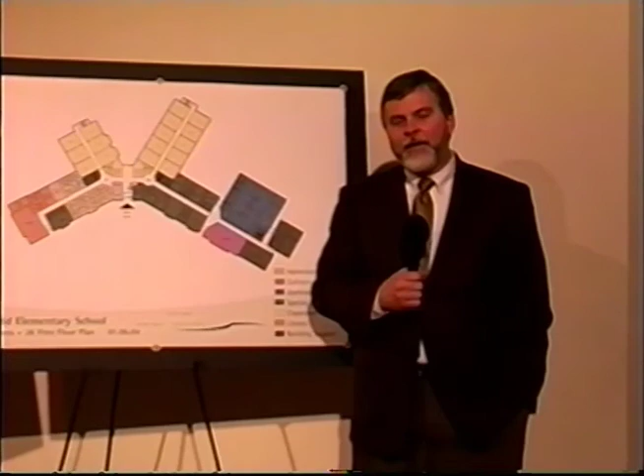Hi, my name is Dan Cecil. I am the architect of the new Litchfield Elementary School. I'm a partner at Harriman Associates, and I lead the education team in the office, and I'm very happy to be here tonight to have the opportunity to walk the community through the site plan and the floor plan and give you all the information that you would need in order to understand the project.

We are an 80-person architecture and engineering firm. We're actually the 6th oldest firm in the country. We're 130 years old, and we've been building schools all over New England that entire time. It's quite a privilege on our part to be able to have a chance to work on this school with you.

Right now what I'm going to do is pull up onto the screen images of the site plan and then images of the building plan so I can describe them. You can get more information from the superintendent's office, where there are plans and site plans to look at, and we'll have handouts at the deliberative session on February 7th.

Litchfield Elementary School, building for our future. Why do we need a new school? To address the overcrowding at all 3 Litchfield schools.

Currently, the Griffin Memorial Building is very overcrowded. Right now, we have 5th grade in portables at the Litchfield Middle School, and our superintendent's office takes up several classrooms at Campbell High School. By building a school for grades 1 through 4, putting 5th grade at the Griffin Memorial Building and the SAU offices at the Griffin Memorial Building, it relieves the overcrowding at all 3 of the Litchfield schools.

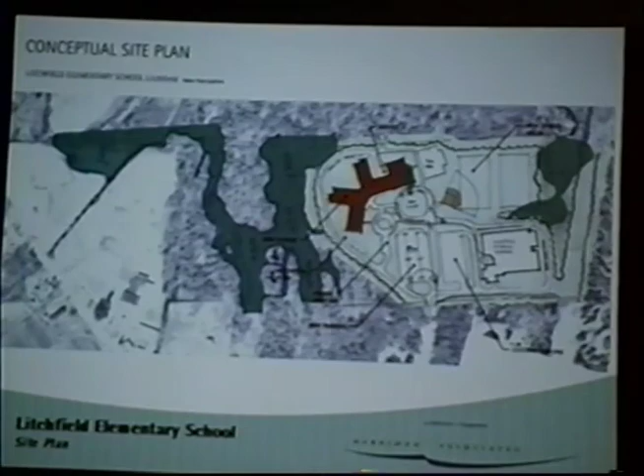On your screen now, you'll see a copy of the latest site plan of the new elementary school. Just to orient everybody, on the right-hand side you'll see a white block, and that's the Litchfield Middle School. In the center of the drawing, the red block is the proposed footprint of the new elementary school. Over to the far left, in this aerial photograph, is the Griffin Memorial School.

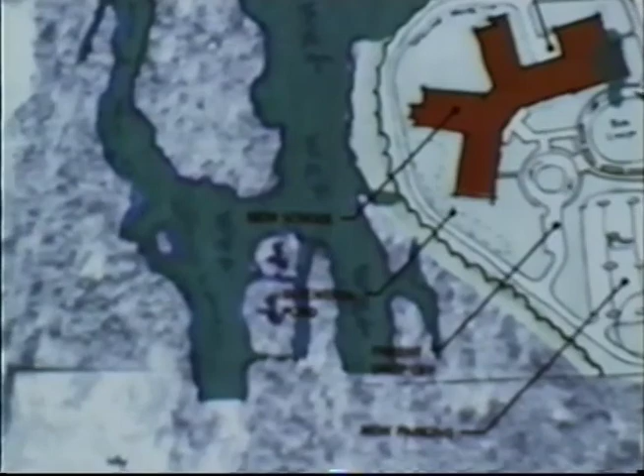There's a large wooded area in between that's actually quite a beautiful area. The area to be developed to the left of the Litchfield Middle School is about 12 to 13 acres total. It's quite a beautiful site for a school, heavily wooded right now. We're going to try to save as many trees as possible to keep the feeling of the site, especially to the north, west, and south, which are quite nice because the site is about 20 feet higher than the ground that Griffin Memorial sits on, so it'll have some views down into the woods and beyond to Griffin.

We've had a number of studies done to verify the viability of the site for a new school. We've had meetings with the Department of Education, with police and fire, the roads agent, and codes enforcement officer. We've had wetlands mapped, and soil tests done where they came on site and dug around 30 test pits to determine the character of the soil. We've also had a traffic study done to study the impact of additional traffic on McElwain and how that traffic should circulate on the site once it gets there.

We have a consultant on board working on the location of a septic field, because this building, like the middle school, will have an on-site septic system. There will, however, be municipal water coming to the site.

The soils report was so good that the soils under the building are high enough quality that we'll be able to reuse them under the parking lots and under the building, which is a terrific thing from a budgeting standpoint. A lot of sites have soils so poor that you can't use them, and you have to bring in sand and gravel off-site, which is fairly costly. In your case, you have about 15 feet of glacial till above ledge and above the water table, which makes it a very good site from a technical standpoint and will minimize construction costs in that area.

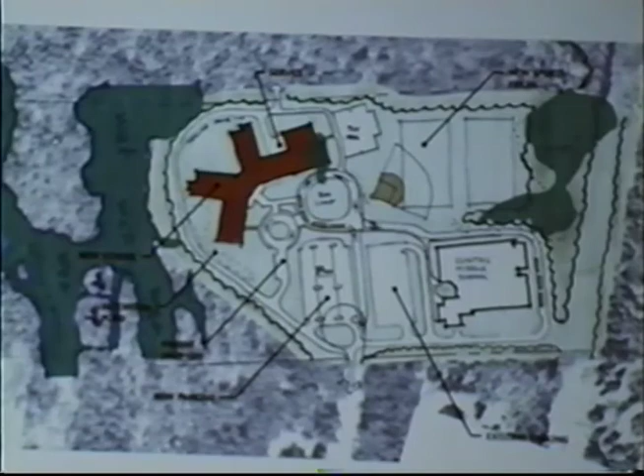Access to McElwain, the white band at the bottom of the screen, will remain the primary access to the site. All cars and buses will come up that way, but there is a secondary emergency egress off the site that I'll get to in a moment. Some road improvements will be required on McElwain to handle left and right turns on and off, but those are modest in size. The traffic study found no need to widen McElwain, since it's plenty large to handle both existing traffic and what we'll bring to the site.

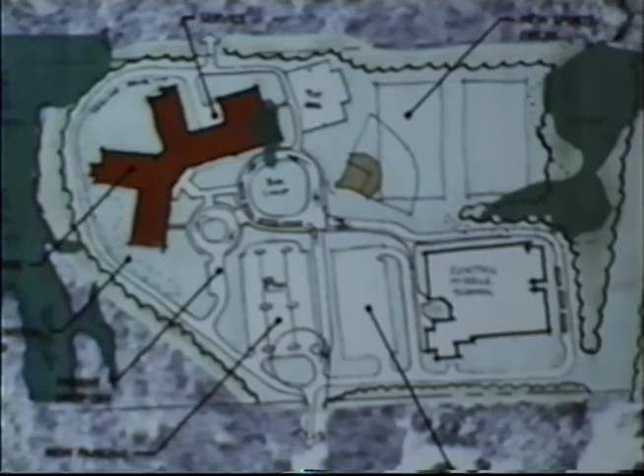One of the most important things in deciding where to put a building on a site is to look at the solar orientation. To orient all of you at home, the top of your drawing is roughly due north, so you can see the building footprint is oriented so the front faces roughly south and east. This is the ideal orientation for passive solar gain.

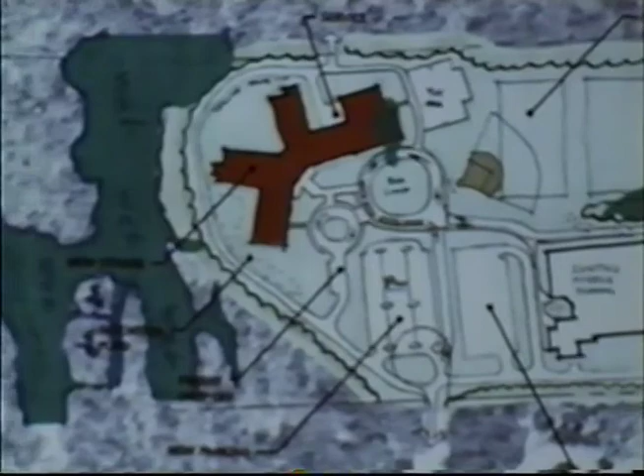It means we'll get the most impact from the sun during the day. We've turned the building so there'll always be sunlight on it from about 7 in the morning till 3 in the afternoon, when the kids, teachers, and most of the people are in the building. This makes a very welcoming entrance to the building. The other effect is that heat reflecting off the building from the sun helps melt snow and ice that accumulate after storms, so we get a little help from Mother Nature to make the entrance to the building safe.

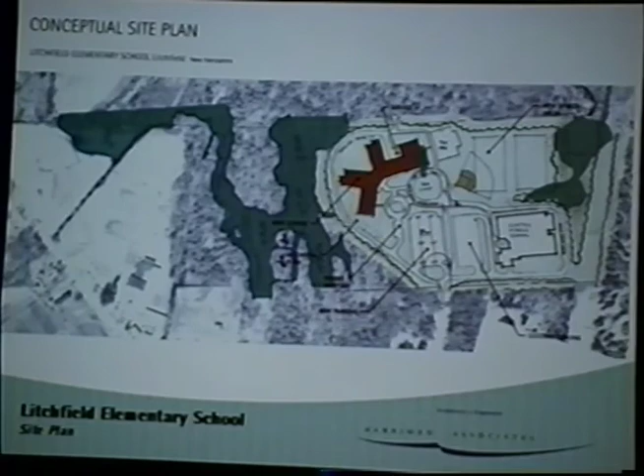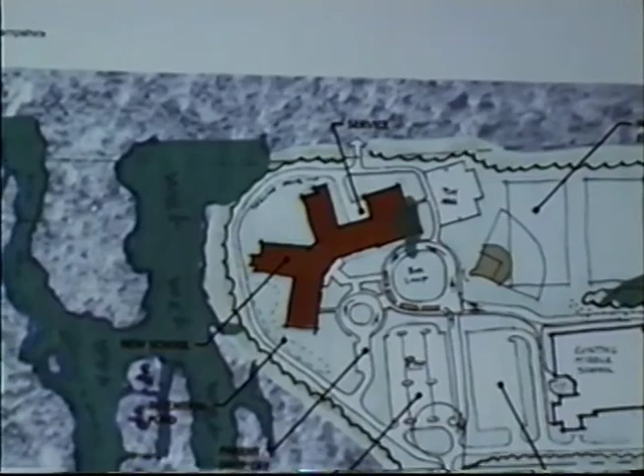In terms of the configuration of the plan, the building has an X-shaped configuration that's bent in the middle, because that is the space available on site after you put in place the parking, the bus drop-off, the parent drop-off, playgrounds, play fields, service drive, and all of those items. So the building is efficient in its layout and is taking advantage of the site. And in fact, the soils in those areas are very, very good as well. I'll talk in more detail in a few minutes about where exactly each piece of the building is in the plan.

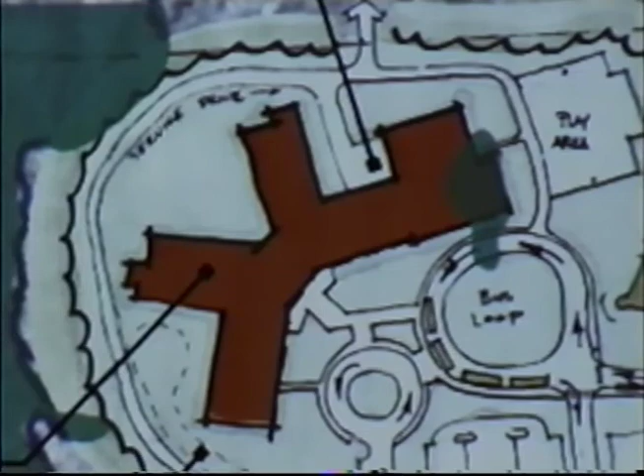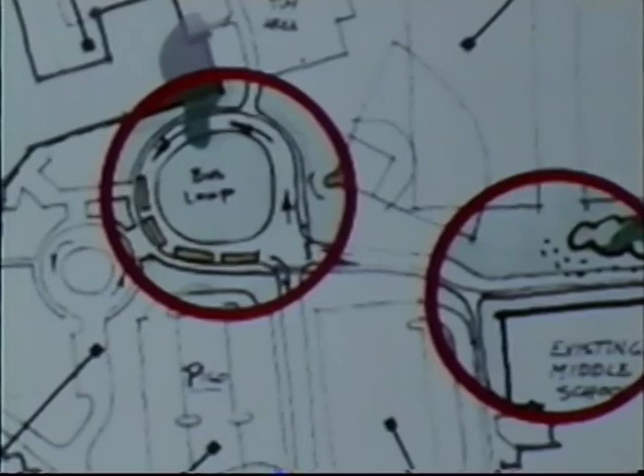The first thing you do when you start laying out a site plan for a new school is attempt to separate the buses from the cars from the pedestrians. This is an issue right now with Litchfield Middle School, in that in the morning and afternoon, buses and cars compete with each other for the driveway space and the stacking space to drop kids off or pick them up, lengthening the amount of time that activity takes. It also mixes buses, cars, and pedestrians walking in between them, which is inherently unsafe—something this plan attempts to rectify.

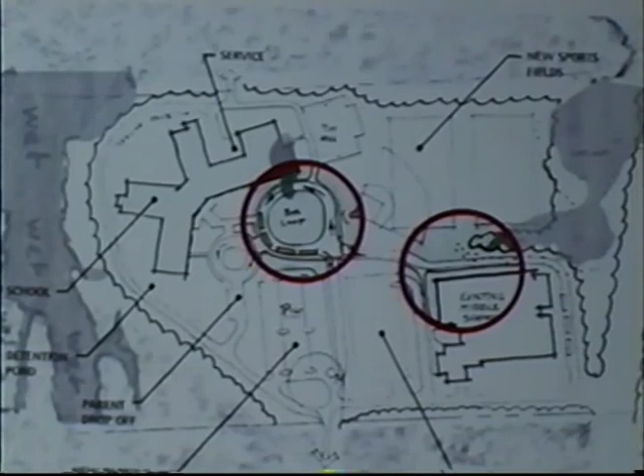So when we started the layout, the first thing we did was lay out a bus loop for the new elementary school. On the screen there are two red circles. The left one locates the bus loop for the elementary school. The right one shows where buses for Litchfield Middle School will now drop off. Buses will enter the site, go straight up to the middle, drop off kids at the elementary school, then leave, go pick up the middle school kids, come back to the site, and turn right to drop off students on the upper side of Litchfield Middle School. This way, buses stay separated from cars and can stack as long as needed without interfering with pedestrian or vehicle traffic.

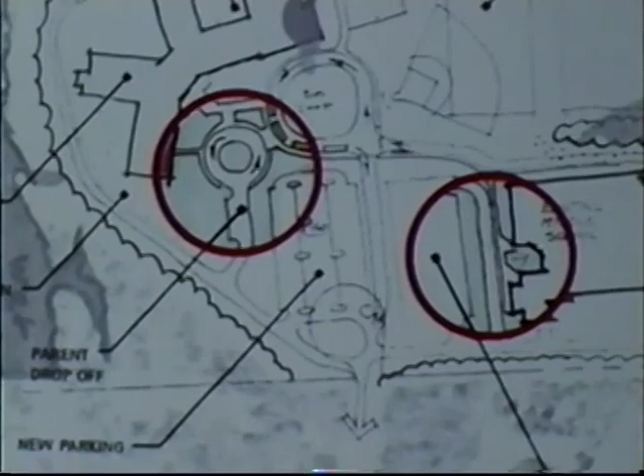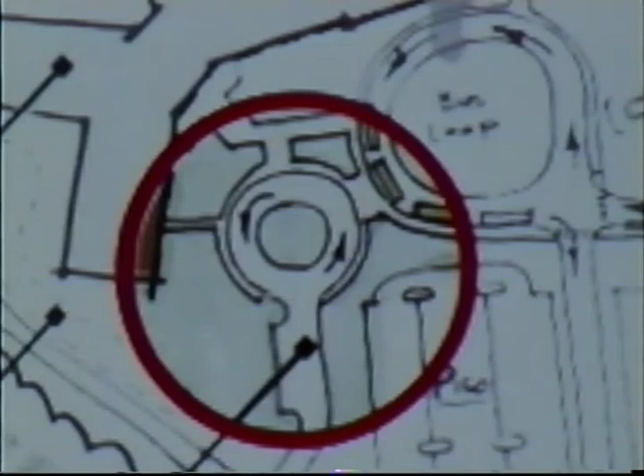In the next slide, we show you where the parent drop-offs are proposed to be. On the left-hand circle is the parent drop-off for the elementary school, positioned so that the bus loop and the parent loop never cross each other. Parents will drive onto the site, and instead of going straight like the buses, they'll turn left, go up to that loop, stack up, drop the kids off, then pull out and leave—never having to cross the bus traffic.

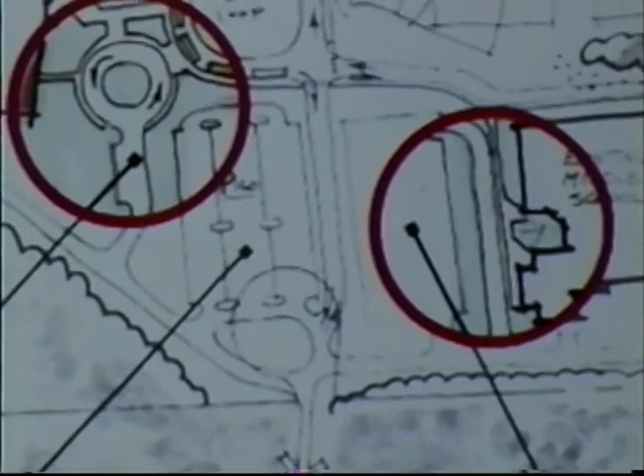In the case of Litchfield Middle School, the drop-off driveway in front of the school that exists now will be dedicated just to automobiles and parents. Parents will come into the site, turn right, pull up in front of Litchfield Middle School, drop off kids, and then circle back around and leave the site, staying separated from the bus loop circulation for Litchfield Middle School.

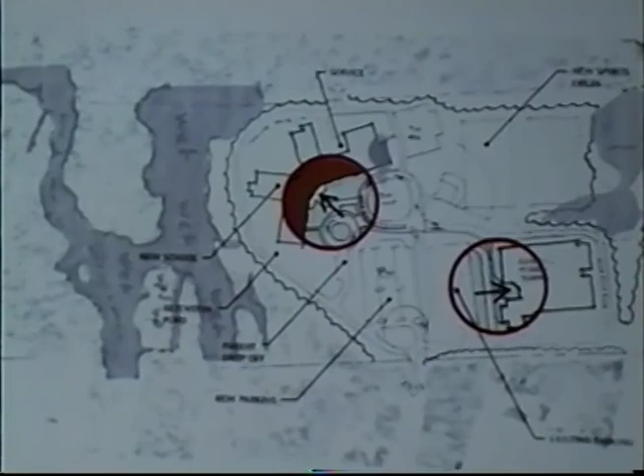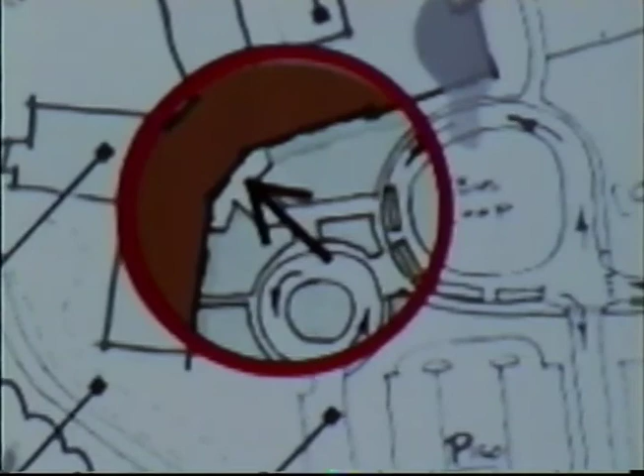The entrances to the building are shown in circles, highlighting how both the bus and car drop-offs are focused right in front of the building to make the walk from those areas as short as possible, especially in bad weather, and to make the front entrance visible from the administration area so they can see who's coming in and when buses are there. This also provides a circulation path for students from the drop-off areas into the building, as well as between the two schools, so that all the resources in each school can be shared by both.

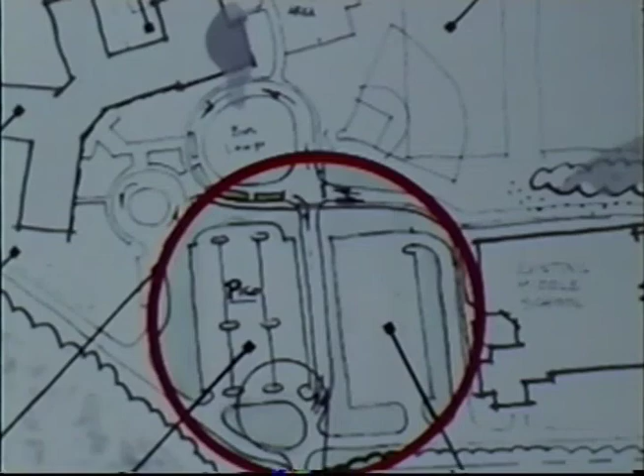In this next slide, we're showing a layout of the proposed parking area. On the right-hand side, inside of that circle, is the existing parking lot for Litchfield Middle School. One of the nice things about the project is that by building the new building, you'll be able to remove the portables from that area and thus increase your parking in that area substantially.

On the left-hand side, inside of that circle, is parking for the elementary school. We're proposing about 150 spaces in that area. And the nice thing about the placement of both of those lots is that they can be shared by either school when you have after-hour events.

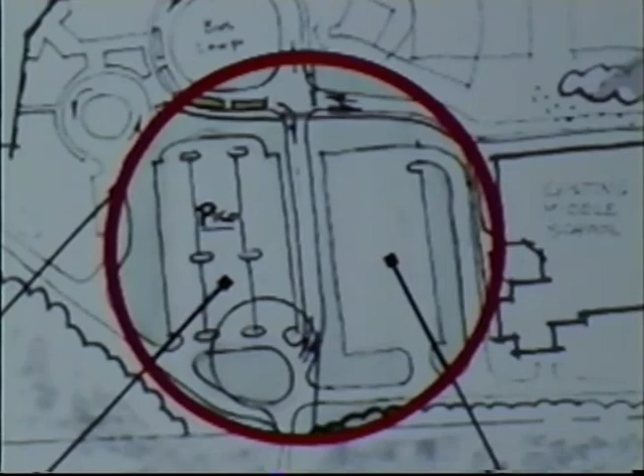For example, if you have a basketball game at the middle school or a play going on at the elementary school, and you have a lot of parents coming in that night, you'll be able to use either one of those parking lots for either school because they're adjacent to each other and roughly equidistant between the two schools. This eliminates problems we heard about in interviews with custodial staff, bus drivers, and administration about the crush of cars and people parking on grass and blocking each other during major events. So that's another existing problem that'll get solved by the new building.

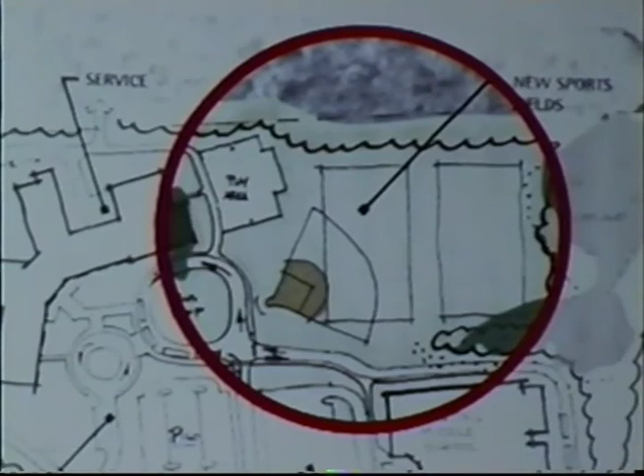Also, you can see in the upper left-hand side, inside of the circle, there is a playground area in that location because the right-hand side of the building plan, as you'll see in a minute, is where the cafeteria and the gymnasium are located.

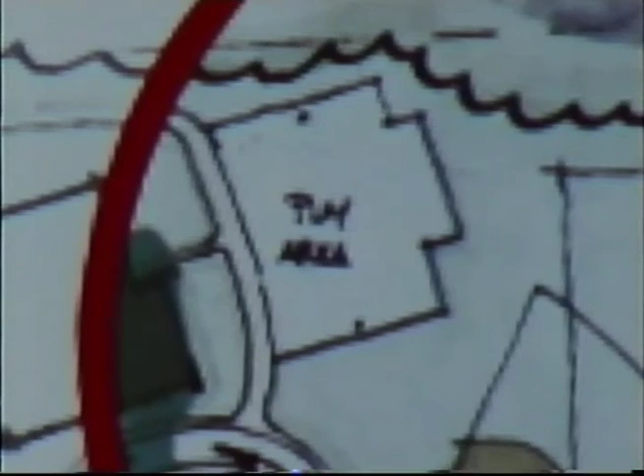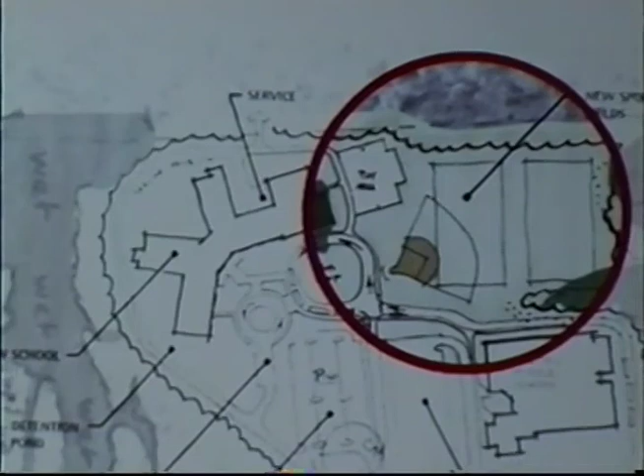The typical pattern that we discovered in visiting the school and spending time at Griffin, watching how students move through the building during the day, is that they go to the cafeteria for lunch, then leave that space immediately and go outside to play when the weather is good enough. So it made sense to put the playground directly adjacent to the cafeteria to shorten that walk, which will be much shorter than what kids experience now at Griffin. It also puts it adjacent to the gymnasium, making an obvious connection between the indoor and outdoor play areas.

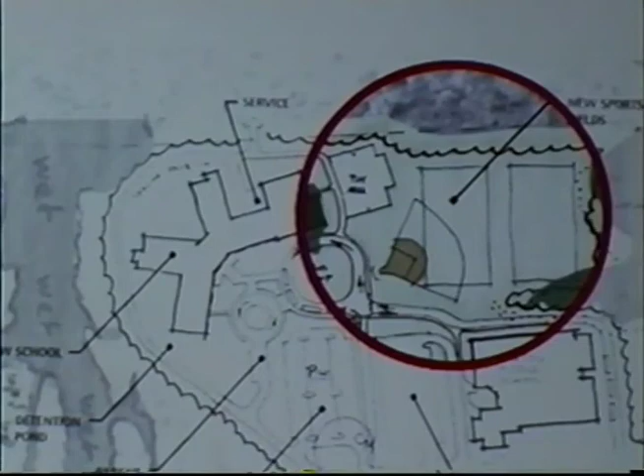In the next slide, we're showing the service entrance for the building. Trucks that come on site to deliver goods and services will come onto the site, turn left, and there's a service drive that loops around the left-hand side of the building to a service entrance in the back. So the dumpster, the transformer, all of those service support spaces will be screened by the building and set in the back.

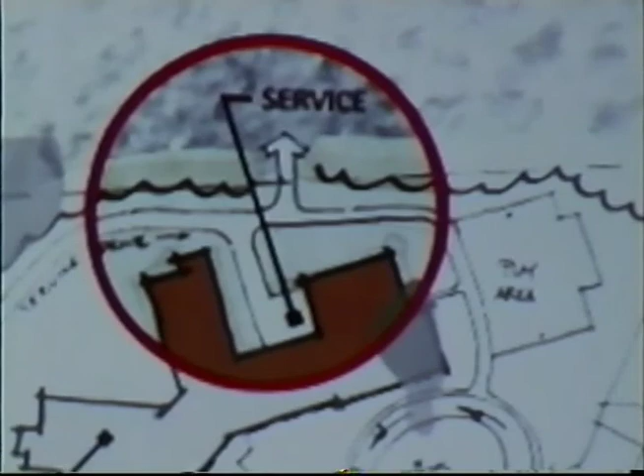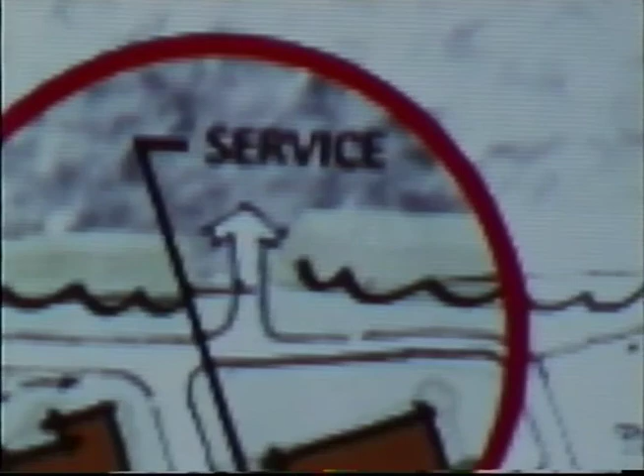If you can see on your screen, inside the circle at the top there's a note with an arrow pointing off the site, which is the approximate location of the second emergency egress driveway. This will exit through a development about to be built off into that area, so that in the event of a fire or emergency, if McElwain was blocked, the fire department or emergency services could access from the back side. There will be a gate there that only emergency services and custodians would have a key to, so it can stay locked and not be a place where cars could normally enter, but only for emergency access.

So that's a good compromise between having two accesses to the site, but not bringing cars through another area of the town.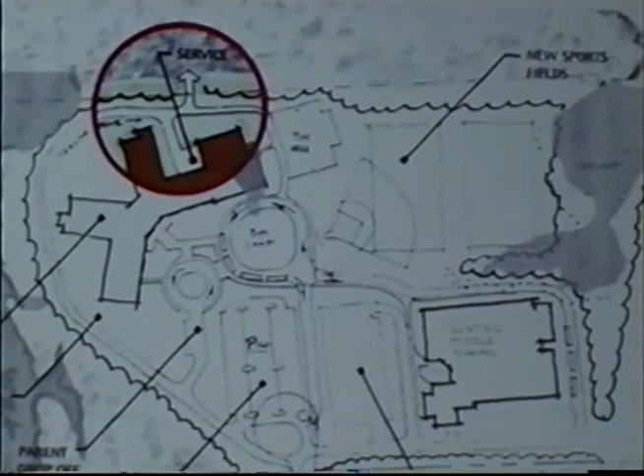What you have in front of you is the current building layout. Again, this layout is a product of many hours of interviews with the staff, custodians, and administrators inside of the building, and then looking at numerous potential configurations of the plan with the building committee. There were 3 final plans that the building committee looked at, and this was the one they chose as meeting their needs and as being the most efficient, working for their educational programs in the best way.

So what I'm going to do now is walk everybody through the building, and we've highlighted areas one by one so that you can see how it's put together.

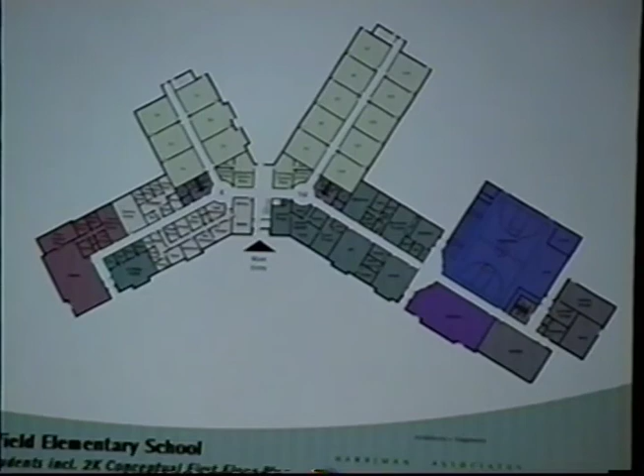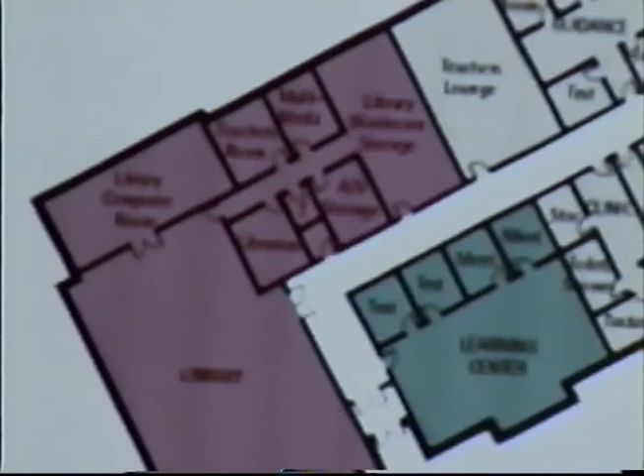The way the plan is organized, the library is on the left-hand side, located there because that area gets morning, noon, and afternoon light, so it gets sunlight all day long, and it also has the best view on the bluff overlooking the forest and Griffin. On the right-hand side is the gymnasium and cafeteria, located there because of the playgrounds and playfields, as I discussed before.

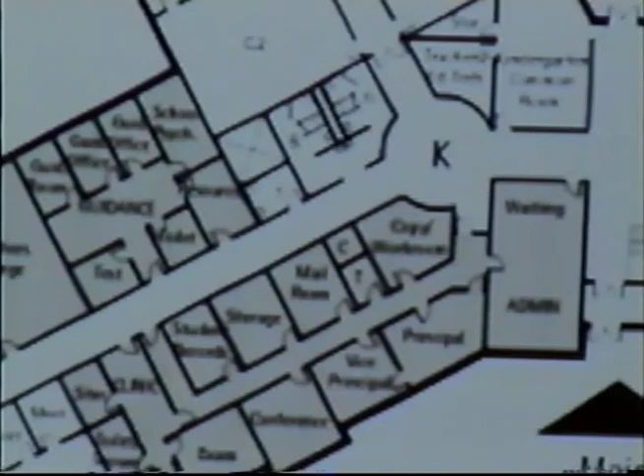In this first slide, there's a gray area to the left of the main entrance, which is in the center, and that's the administrative offices, some special ed rooms, guidance, counselors' offices, and other basic administrative functions. The admin offices and reception area are right at the front entrance, with a lot of glass between the lobby and that area so they can see everybody who comes into the building. They can control it from a safety and security standpoint, and no one can get past them without going through the admin area before entering the building, which provides a lot of safety for the kids.

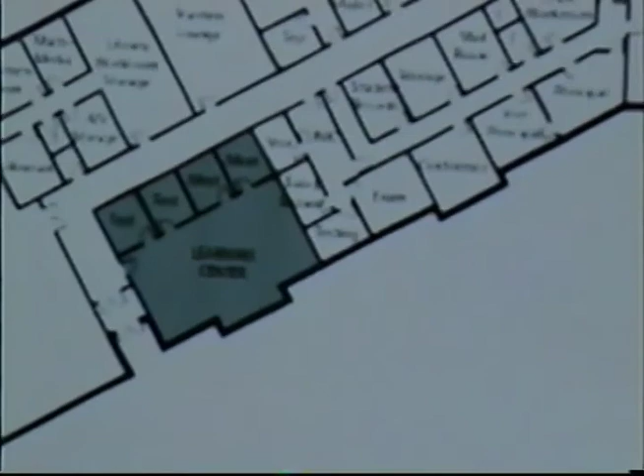The second highlighted area is a learning center, again a special needs program, located adjacent to the library. That makes a nice programmatic connection since this group can use the library frequently, and it's in a nice sunny part of the building.

The next area is the library proper. The biggest space on the left-hand side is the actual reading room and circulation area, and the small colored rooms above are the librarian's office and some storage rooms. It's located there for the nice solar orientation and good views, and it'll be a quiet area tucked up next to the forest, while the right-hand side with the gym is a busier part of the site with parking and playgrounds, so it made sense to put the library in a quieter area.

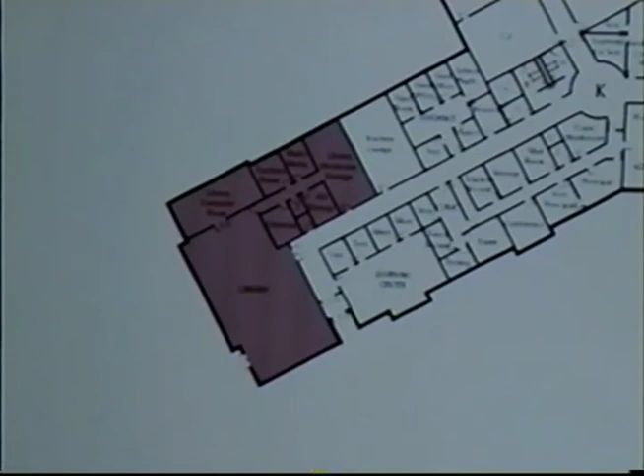The colored area now shown are the two classroom wings. There will be a pre-K and a K classroom, currently in the program at Griffin, and then another 30 classrooms to cover grades 1 through 4 initially. At 20 students per classroom, you need 30 classrooms to meet the target of 600 students.

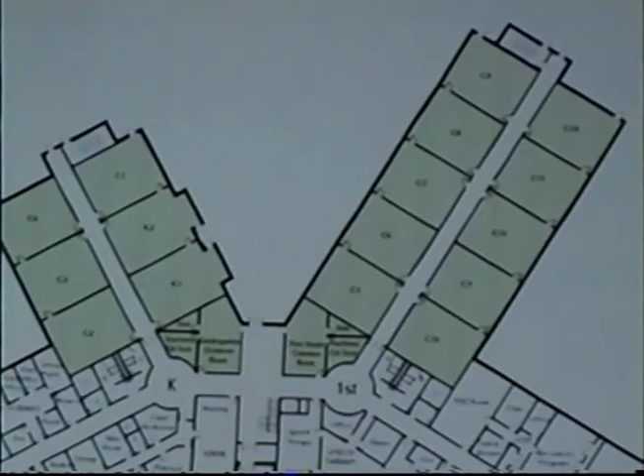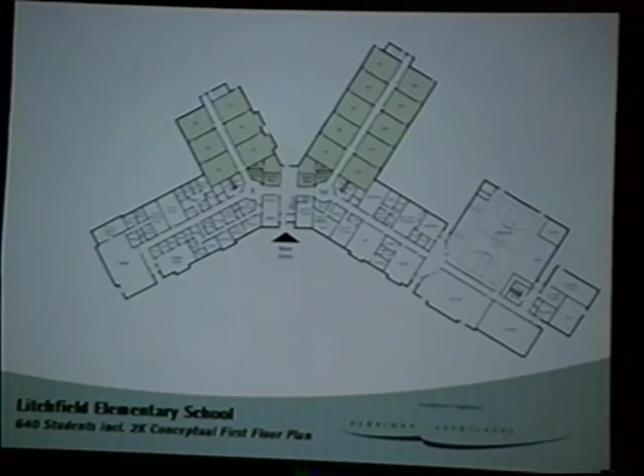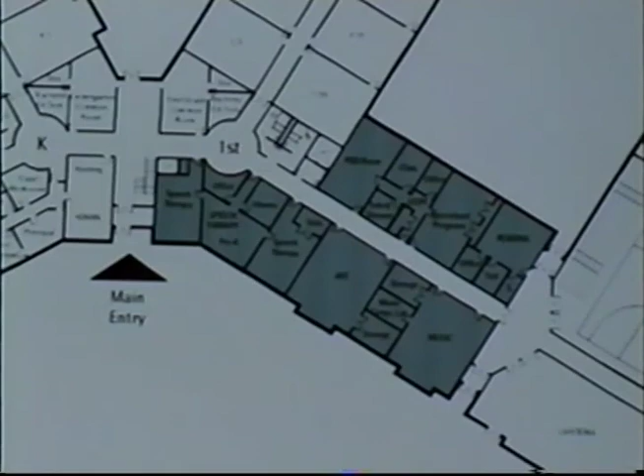On the right-hand side, continuing around the building, are art and music and some additional special ed and special needs programs. Art and music are there because it's nice to make those functions visible, since that hallway connects the classroom wing to the cafeteria and gymnasium and will be used frequently during school. The music room is closest to the gymnasium because in this plan the gymnasium will have the stage on it.

There was a request for a normal size regulation gymnasium, a 50 by 84 foot court, and also a request for 250 bleacher seats on the left-hand side of the gym, with the stage on the right-hand side. So the gym will be the big phys ed space, and also the big assembly, music, and drama space.

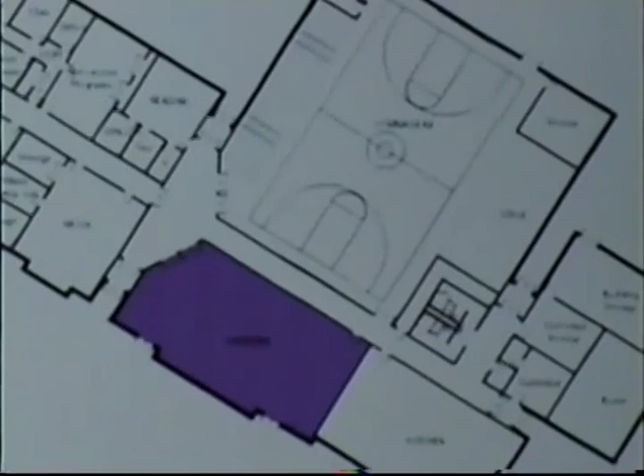This is the location of the cafeteria. It's there in part because it's close to the playground area, and also because it's nice to have sunshine in the cafeteria all day long, since it'll be used not just for lunches but all day for group activities, like when you need a large room for a special educational program. So it's nice to have that on the south side where it'll get light all day long.

It's also nice to have it there because it makes it easy for us to have an evening event that may use either the gymnasium or the cafeteria. We can lock a pair of doors at the corridor just across the hall from the cafeteria and lock off the entire rest of the school, but allow community use of the gym and the cafeteria and their toilets, bathrooms, telephones and vending machines for after-hours use. This extends the use of the building very effectively into the evening without having to open up the entire building when you've got an event there.

In similar fashion, if there's an after-hours event in the library or in the administration offices, you can lock off the classroom wings the same way, so you can reduce the amount of area that people can circulate in and the amount of area that you're heating and have lights on for special events, which makes it very economical and very useful for community use.

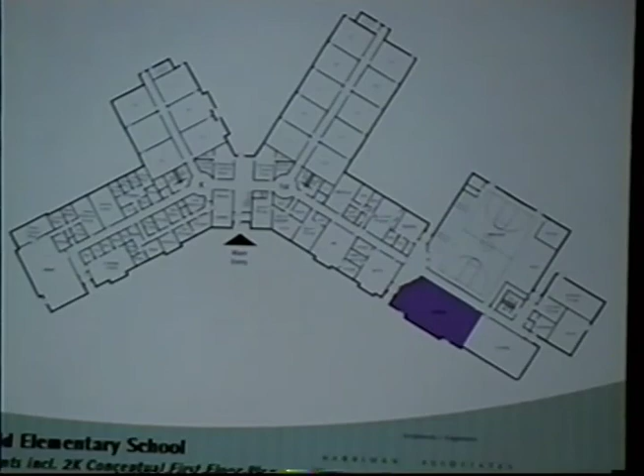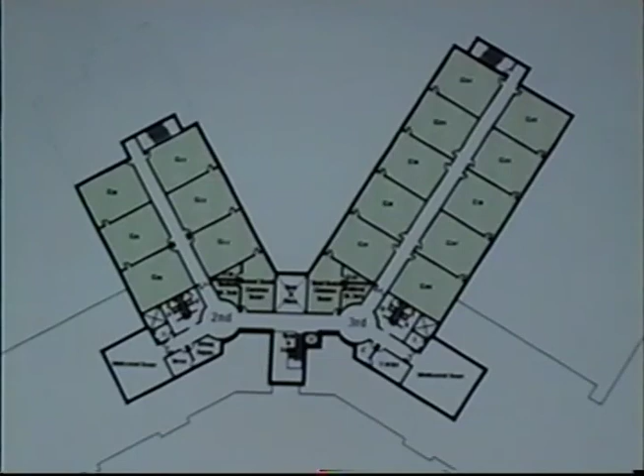This is a copy of the second floor plan, and again, it just stacks over the first floor plan, which is a very economical way of doing things. And it gets you the total number of classrooms, 30, as I said before, that you need for the project.

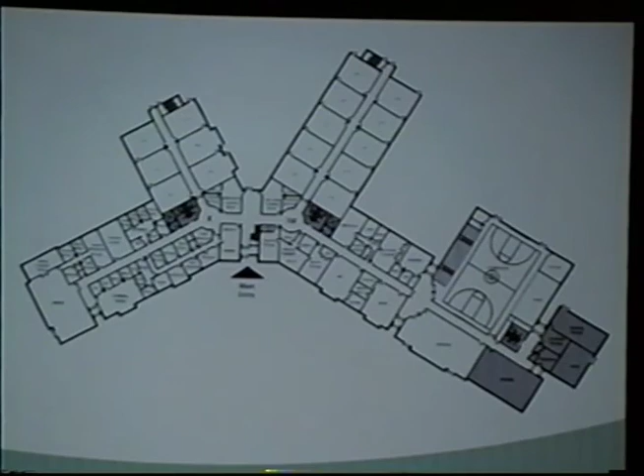The reason the plan is organized like this, with a smaller second story than you have as a first story, as you can see in this slide, is because the code requires that all common spaces, or all spaces that any kindergartner or first grader would be in, have to be on the first floor. Kindergarten and first grade kids are not supposed to be up on the second floor. The code has a concern about mixing kids of different ages and sizes in the event of an emergency. So to be cautious, it requires that all common spaces like the library, the cafeteria, all the special ed spaces, admin offices, guidance, those kinds of rooms are all on the first floor.

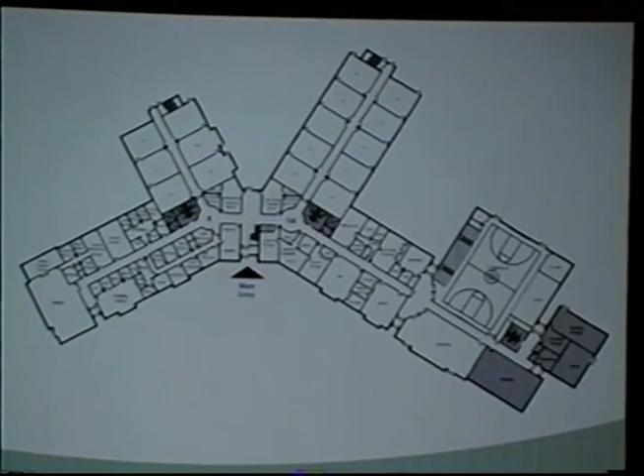So in order to make the plan as economical as possible, we put those on the first floor, but then we go and stack the classrooms that we need in second and third grades up on the second floor, because it's economical to build that way.

These are core spaces up on the second floor: mechanical rooms, toilets, elevator shaft, that kind of basic support program.

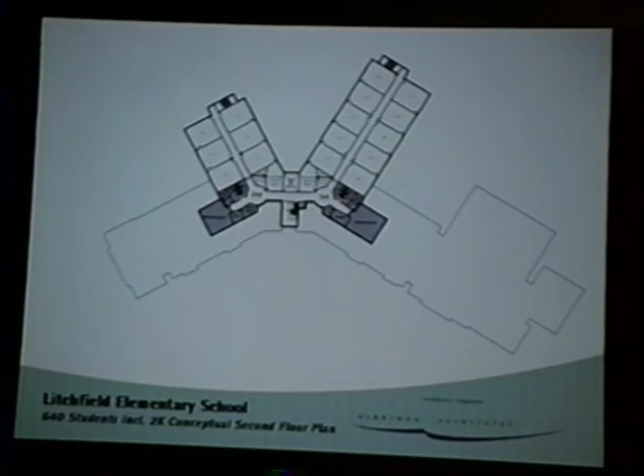I'd note one other thing, that the building itself has a basic double-loaded corridor plan, which is a very economical use of space. What that means is that there's a corridor running down through the middle of the building, lined on either side by classroom space. That's one of the most efficient ways that you can build a building, as well as providing natural light into all the rooms that the children would be in, which is a very important thing in the design of a school.

The other thing we like to do in our schools whenever possible is try to create some symmetry. You can see that the left-hand side of the plan and the right-hand side of the plan have a lot of things in common. They're not quite mirror images of each other, but they have a lot of similarities. From a construction standpoint, that means you'll reduce construction costs, and it makes it simpler to build, with a few economies of scale for doing it that way.

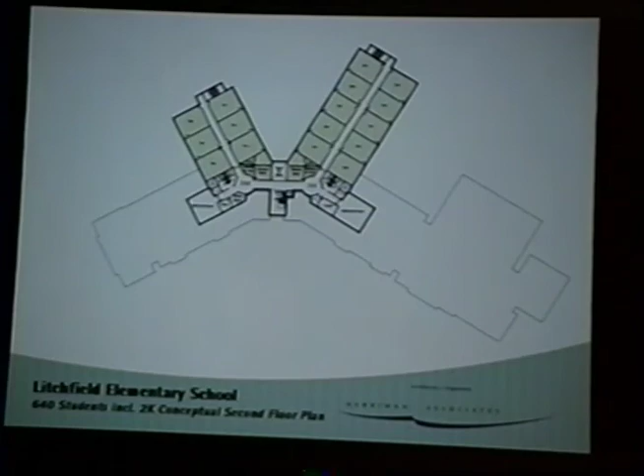This protects the doors and extends their life, and also reduces the potential of people slipping as they come into the building. The gable on the left-hand side of the plan is over the library. On the right-hand side of the plan, there's a gable over the cafeteria.

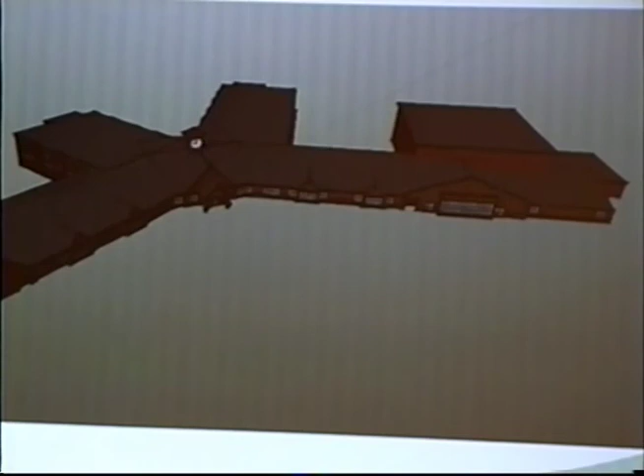The sloped roof over the front wing hides the fact that there's a two-story classroom wing behind it, which is helpful in an elementary school with children of this age and size, because it makes the building look smaller than it actually is, and makes the scale feel more domestic and more New England in character.

But again, the pitched roof is something being considered for the plan right now, but it's not set in stone yet. It's something that'll be reviewed by the building committee after the referendum.

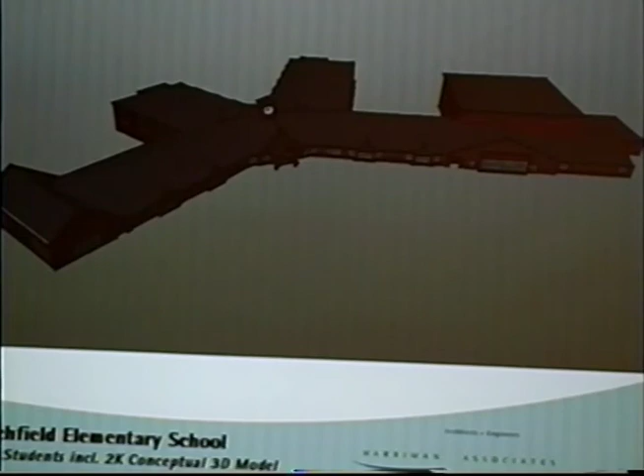This is a close-up view of the 3D model of the entrance to the building, showing one idea of what it might look like. This is by no means a final design, but since the children are very small and young, it's nice to scale the entrance down by having a porch in front of the building, so the entrance feels more like entering a house rather than a school of this size.

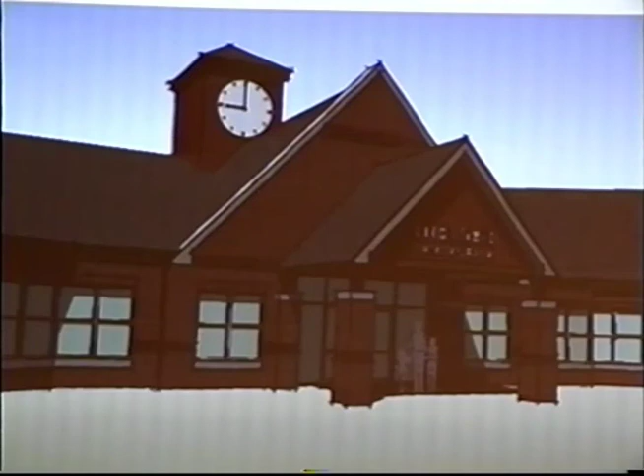There's been some consideration about the potential of a clock tower. That's not firm yet, but it's being looked at and will be discussed by the building committee at a later date.

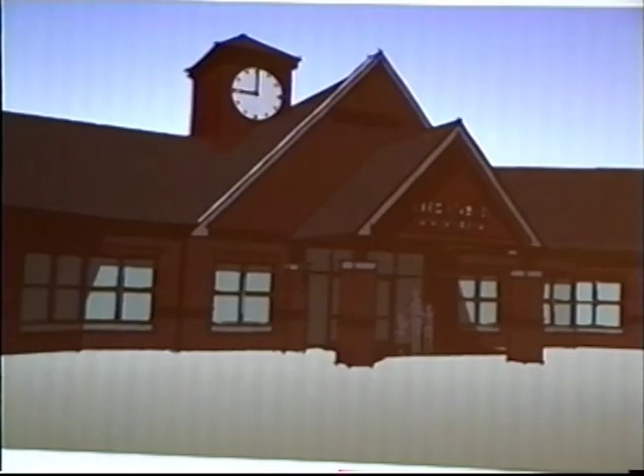The other thing we try to do for schools at this age group is, on the inside of the building, since the children are very small, we'll go to the school and measure the eye level of the smallest kindergarten children and the tallest fourth grader, and try to put all the bulletin boards, display boards, windows into rooms, and display cases down at that level, so as the children walk through the building it feels very open to them, and they can look into rooms and see what's going on.

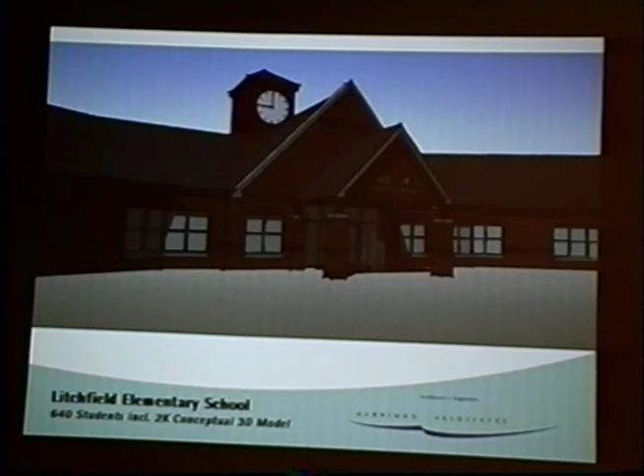We do the same thing on the exterior windows of the building, so that a child going up to an exterior window will find the sill below their head height, so they can look out. The experience of the child in the building becomes much nicer. It makes it feel like the building really belongs to them.

We spoke with faculty, staff and administrators about the space needs at the Griffin Memorial School and how we could meet them in the new school.

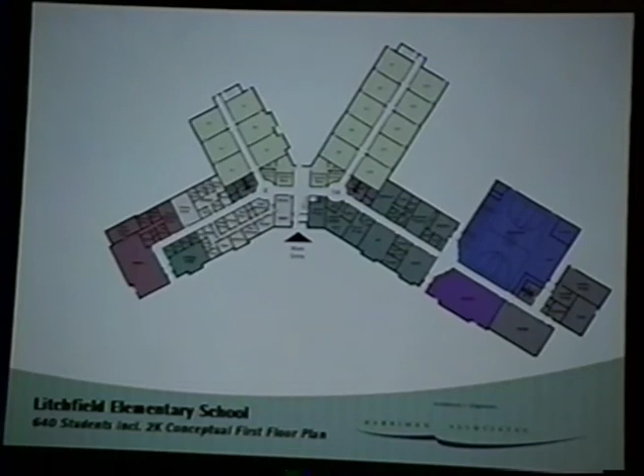The current plan we're looking at, the latest iteration, is about 88,000 square feet in size. It's down quite a bit from earlier versions we discussed with the public at earlier information meetings. At the deliberative session, we'll have a handout for the floor plans and the site plan, and we'll be able to talk in great detail about all the features of the building and answer all your questions.

The school board has looked at proposing a 15-year bond or 20-year bond, and will be receiving specific information by deliberative session. Right now, the preliminary amounts are coming in at less than $1 per $1,000 of the tax rate for the first year's tax impact. Year 2 is always your most expensive year, and it declines after that. Right now the preliminary information is about $3, slightly under. Those will be firmed up, and information will be available at deliberative session.

Deliberative session is a very important meeting to attend. It's the opportunity for taxpayers to receive information and debate the merits of the various warrant articles. Warrant articles may be amended at deliberative session, up or down, by a majority vote of the people attending. Those items that are changed, or those that remain unchanged, are the items you will then vote on March 9th at the polls. It is very important that you come to deliberative session.

This year, deliberative session for the school district will be held on February 7th at 1 o'clock in the afternoon. This is a change, based on input last year requesting that it be made more accessible to people with families and young children. So please plan to attend at 1 o'clock at Campbell High School for the school district deliberative session.